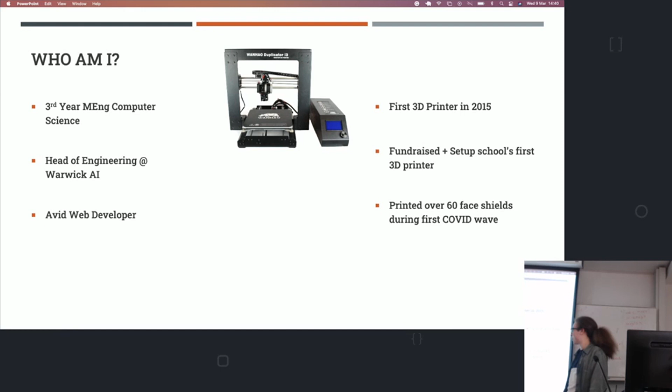I also fundraised and set up our school's first 3D printer. As a small school, it was quite a big thing for our product design department to have our own 3D printer. Also during the first COVID pandemic wave, I worked with a team called 3D Crowd, who gathered thousands of 3D printers around the UK to make face shields. I printed over about 60 of these components for face shields.

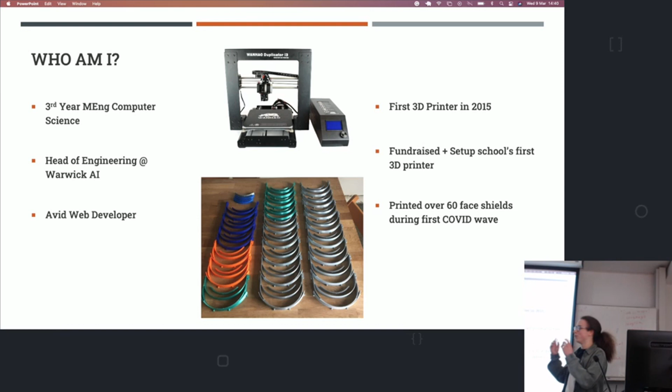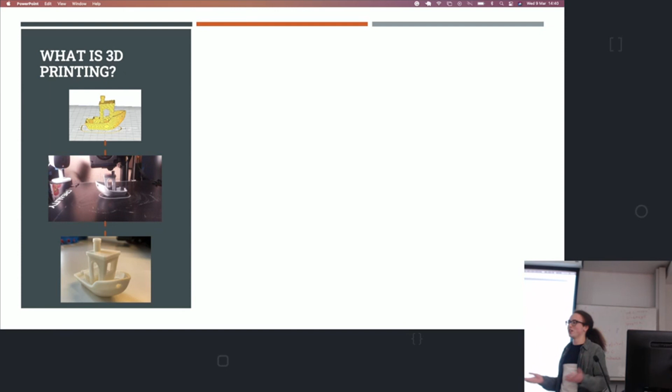So to start off, what is 3D printing? Over recent years, people have associated it with one 3D printer design, but it's a lot more general what 3D printing is. The idea of 3D printing is to create a 3D object via an additive manufacturing process, so not removing material, just adding material, from a digital specification or model, like a CAD file or some machine code instructions. That's typically how it's done.

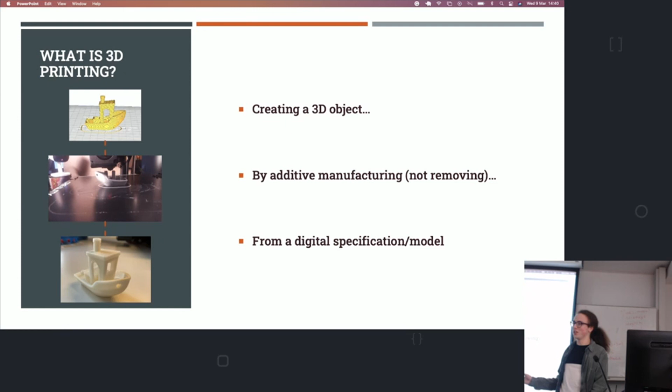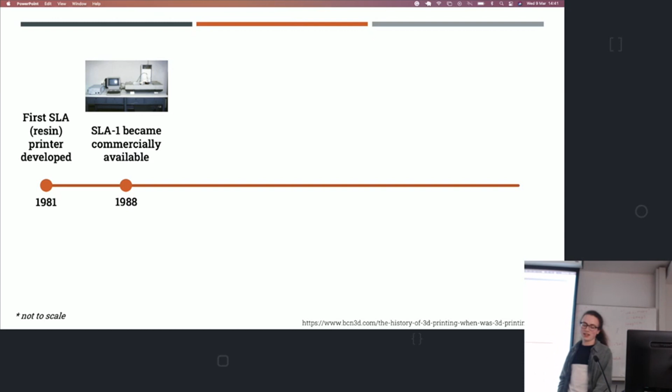Now you know the basic idea of 3D printing. We'll go a bit through the history. The first 3D printer concept was developed in 1981. It was an SLA machine, basically where you've got resin and you cure the resin with a UV light. A company took this idea on and released the first commercially available machine called the SLA1 in 1988. In that same year, a patent was filed for another form of 3D printing called SLS, where you've got powdered metal, and with a laser you do loads of little welds to produce a 3D part, then you layer it up.

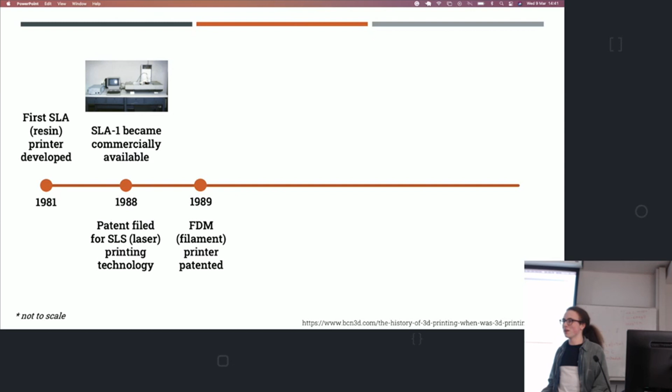Then in 1989, a patent was filed for FDM printing, which is the standard, most well-known 3D printing method that you're probably familiar with. Between 1989 and 2005, 3D printers were mostly used commercially, often as rapid prototyping machines, not really for final parts for anything, more just internally to develop models.

Then in 2005, the RepRap initiative was started, and the whole idea with RepRap was to create a 3D printer that could print another machine, so print parts of another machine or the complete machine, and also print other stuff. That, combined with the patents for FDM expiring in 2009, is how the modern day 3D printing revolution started.

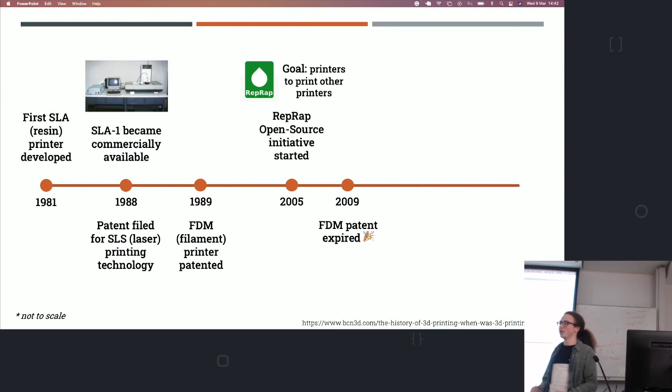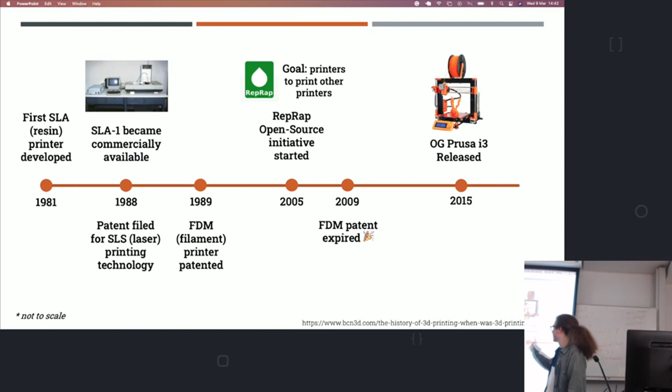Between 2009 and 2015, printers became cheaper, components got cheaper, and standards were starting to be introduced. Then Prusa, probably one of the most well-known 3D printer companies, released in 2015 their standard i3 Prusa design, which is what a lot of 3D printers are based off. The 3D printer I've got at home, you can tell it's this similar box shape, and the design is still used today as the standard.

So I'm going to go quickly through different types of 3D printers. There are 4 types that are seen. The first one is the standard FDM, or fused deposition modeling. The idea of FDM is you've got a reel of filament, and you work from the bottom up, laying down layers of plastic. You build up layers, and you can often see the layers when you do FDM printing, because it squishes the layers on top of each other to build a 3D model.

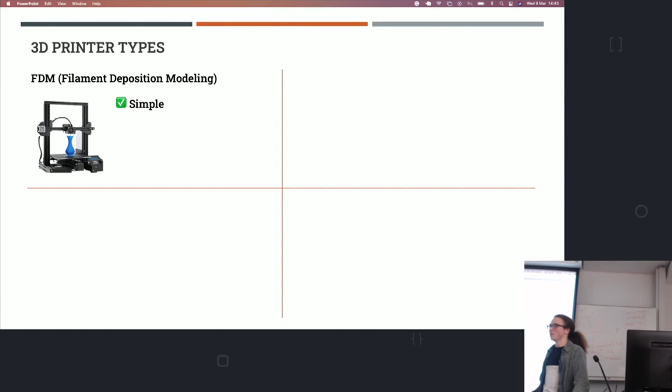The advantages of this is it's very simple in comparison to the other methods, which you'll see in a minute. It's also quite low cost, both initial cost and material cost. And it's very safe to use - the only real dangerous part is the hot end, which is usually over 200 degrees, but as long as you don't touch that, there's not much that can go wrong.

The issue with FDM is because you're printing layers, you've got to physically, manually move a hot end around to lay the material, so it's quite slow. And the speed of your prints scales with the volume.

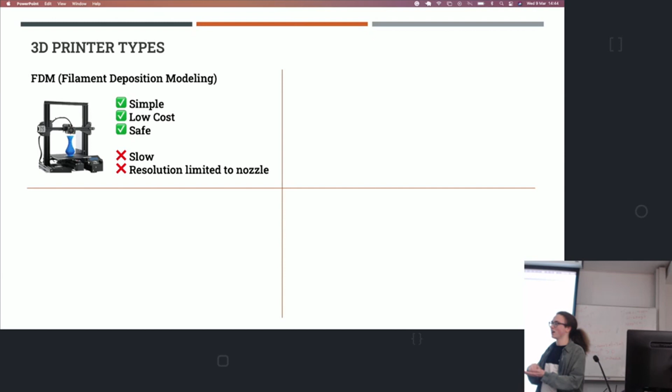So you can imagine if you increase the size of your model by 2 times, your volume increases 8 times, so your 3D printing time takes 8 times longer. Also your resolution, how fine of details you can do, is typically limited to the hole diameter in your nozzle. That's a trade-off: if you make the hole smaller, you have to print slower because you can't push as much filament through, but when it's bigger, you lose the resolution, so your minimal thickness of material you can extrude gets higher. You can't be as finely detailed.

On the other end of the spectrum, there's SLS, selective laser sintering. This involves a fine powder, typically metal, sometimes plastic, spread across a bed. A laser with a mirror will direct around to weld parts of the powder together to form a shape, then it puts another layer of powder and does the same. So again it's this layering up process, but instead of extruding material, it's welding material.

Now you get very good print quality with this because your resolution is no longer determined by the nozzle size, it's more determined by how finely you can move the laser. It produces very strong parts. This is down to being able to produce metal parts, whereas you can't really extrude metal out of a standard 3D printer.

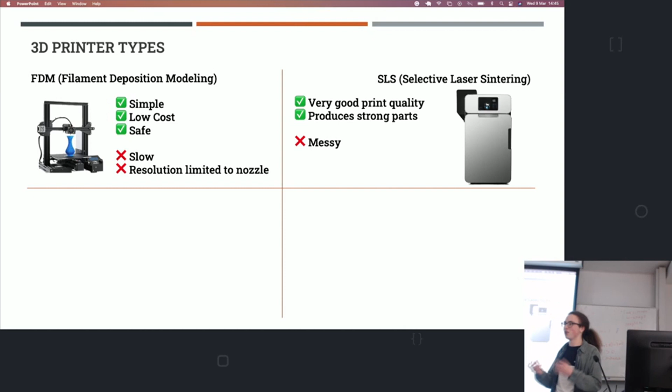But the issue is it's quite messy, so the powder isn't very nice to deal with. It's very fine, almost like dust, and it's not for consumers at all. It's very expensive, these machines can easily cost 100 to 1,000 times more than an FDM. They're typically used in industrial applications, and tend to be used more for final parts in a mechanical assembly, whereas a lot of the time FDM printers are more just used for fun models, where you don't need to depend on the part as much.

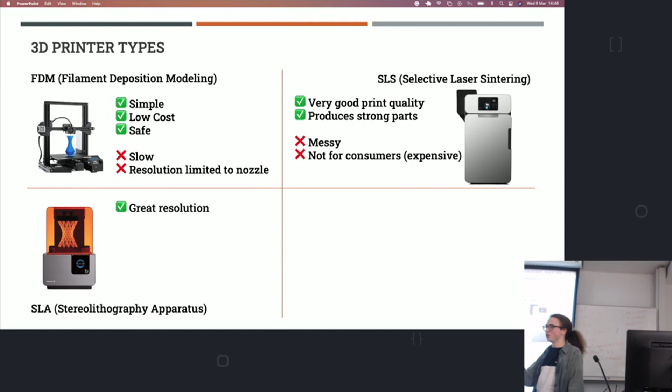Then the third type of 3D printer is SLA, which is curing resin with UV light by moving the UV light with a mirror. Similar to SLS with the mirror, but now it's UV light and you've got resin, a liquid material. Again you're limited in resolution by how finely you can move the UV light, so it's got quite good resolution, and really good print quality too, because of that high resolution.

But the issue is resin, especially uncured, can be very dangerous. It's got fumes, so if you inhale it you can easily get an allergic reaction. You've got to wear gloves when handling it. And when you take prints out of the machine, they're not necessarily fully cured, so there's danger even once the print's finished of being harmed by the material.

They're also slightly more expensive than FDM, though they're coming down in price over recent years. The craze that happened with FDM has happened with SLA too, in that a lot of the companies that made really good FDM printers, like Prusa, have now made SLA printers.

The final printer type is DLP, which is similar to SLA, but instead of moving a UV light around with a mirror, you can think of it as a screen, and the screen flashes light with a trace of where it wants to cure the resin. So if the resin is above the screen, wherever the screen is lit up, it will cure that shape in the resin for that layer, then the layer pulls off and it does it again for the next layer.

So again, it's got the same qualities as SLA, great resolution, amazing print quality, and one more advantage: it's a constant time per layer. No matter how much you want to cure on one layer, it takes the same amount of time between prints, because you're no longer having to move something around. You just flash the light, displaying what you want to cure on the screen, so there's no mechanical moving parts.

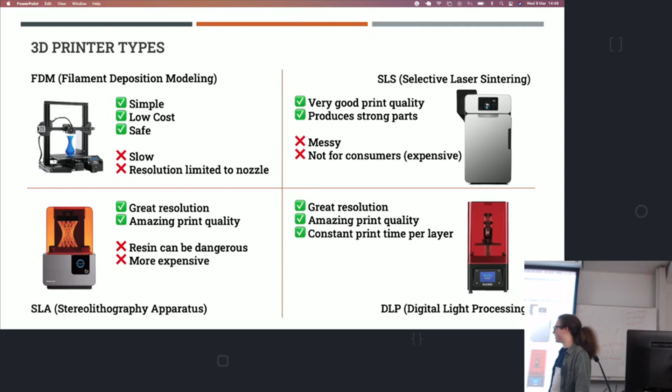The only mechanical part on these is lifting the bed up and down, so there's a lot less to go wrong, and that's kind of the standard. People kind of mix up SLA and DLP. DLP is the cheaper version of SLA a lot of the time, just because it's easier to make and maintain. But again, resin can be dangerous, and it's slightly more expensive than FDM.

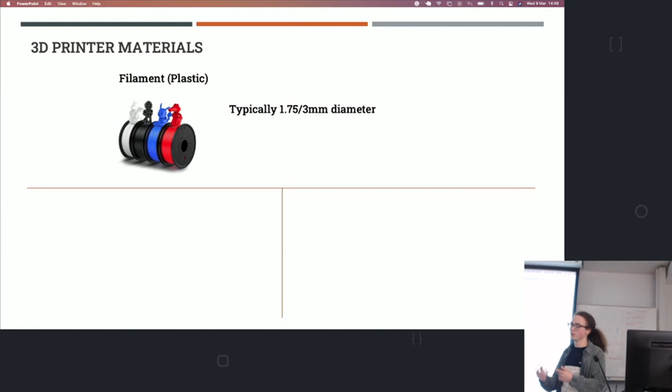Moving on to the different types of materials you can print with. As mentioned earlier, FDM uses plastic filament, typically 1.75 to 3 millimeters in diameter depending on the printer. Most printers you buy use 1.75mm. They get pellets of plastic and extrude it into a long filament spool, typically coming in 1 kilo spools.

Because of the requirements of 3D printing with filament, all it needs is to maintain its integrity in storage, and as long as it can be melted at a reasonable temperature, you can basically use whatever material you want. The most popular one is PLA, polylactic acid, which is based off a naturally occurring material. Then there's ABS, which is a bit stronger, and PETG, which is even stronger.

You can also print with stuff like chocolate. They've made chocolate-infused plastic to give it the scent of chocolate, but people have modded their machines to actually print with chocolate filament. Typically it's not done via filament then, it's more like a hopper design with the chocolate melting and running through.

With FDM printers there are so many different materials out there: recycled materials, metal-infused materials to make it stronger, wood-chip infused materials to make it look like wood. There are so many. As mentioned, PLA is natural, so you can actually get food-safe prints out of an FDM printer. It's also the cheapest option, at roughly £25 for a good roll of FDM filament.

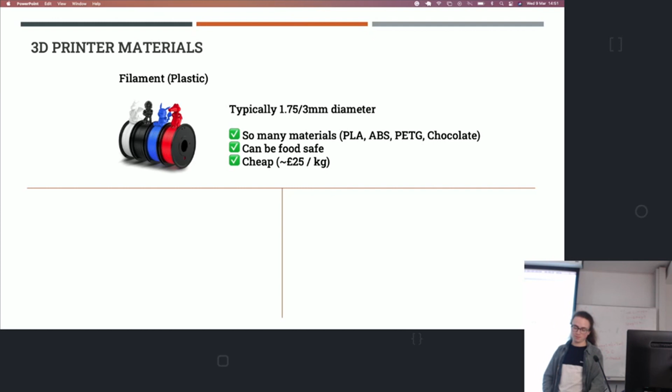The other material is resin, which is used in SLA and DLP, and it's a liquid form material. The issue with resin, as I said earlier, is that it's harmful until cured, and it has fumes associated with it. It's also more expensive, at about £100 per litre.

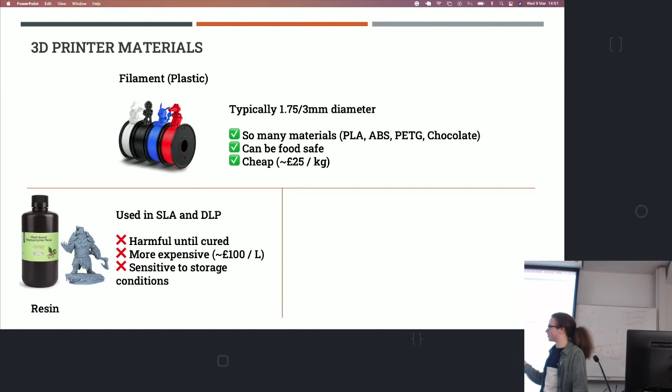Roughly a litre of resin will print about the same amount of stuff as a kilo of filament. You can't make a true one-to-one comparison because you're typically printing in different ways, but it's a similar price for the amount you use. Resin is also sensitive to storage conditions because it's cured with UV light. If you put it in a translucent container it would cure over time and turn into a solid plastic bottle, so you have to store it in opaque bottles.

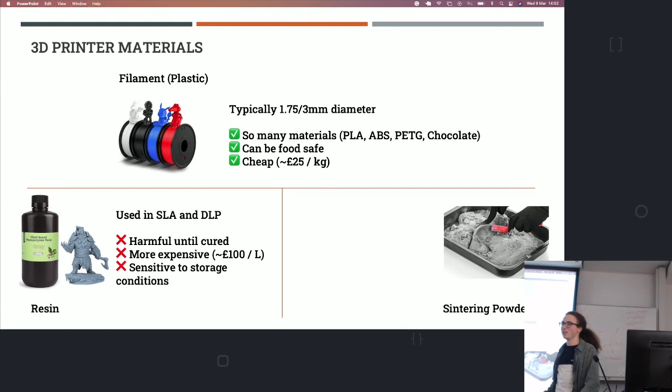The third material, which isn't really available to consumers because it's used more in industry, is sintering powder, used for SLS machines. It's a fine material and safer to handle than resin, though it's still very fine, so you don't want to inhale it or touch it with bare hands. It's even more expensive than resin because it's not just plain material — it has other stuff in it to improve the sintering process, and it's metal, which is going to be more expensive than plastic.

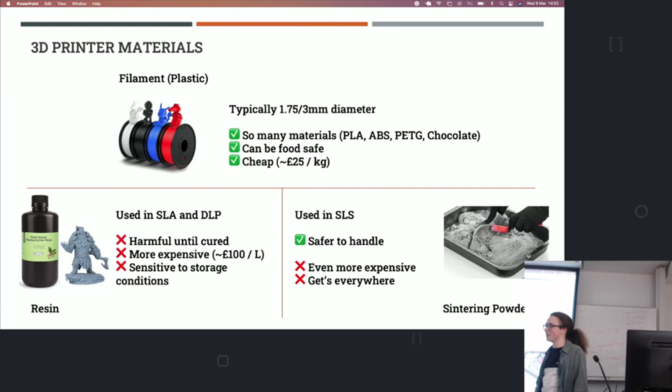It also gets everywhere, so it's not very practical to use. That's another reason you don't really see it in home workshops. It's more used by big companies to make actual parts for products — Formula One, for example, uses SLS to print parts for their cars, and aerospace engineering also uses SLS.

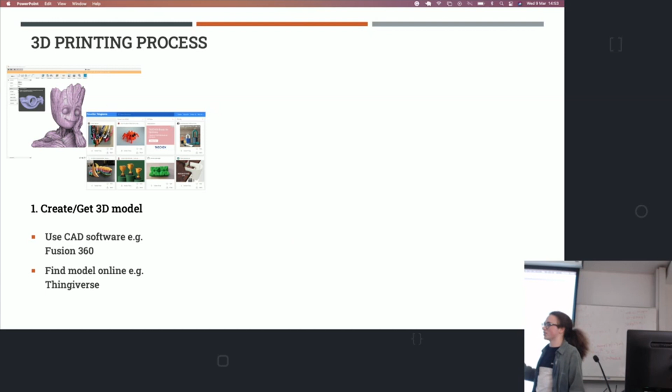So I'm going to talk a bit about the 3D printing process. You start off with a model. This can either be a model that's already been made from Thingiverse, which is a massive repository of 3D models with basically everything on there, or you can make your own in CAD software like Fusion 360.

You want to export that model format into a format called STL, which is a triangular mesh that's the standard within industry. So you're converting your geometric representation of your model into a triangular mesh.

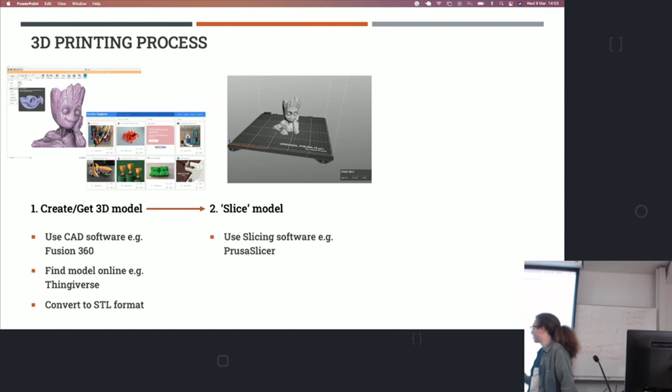Then you send this model over to a slicer. An example is PrusaSlicer. What this software does is convert your mesh into G-code. G-code is a machine instruction code that you run not just on 3D printers, but on CNC machines and laser cutters as well. So G-code is just instructions to send to the printer.

It's called a slicer because it splits your model into slices or layers. You specify how big you want each layer to be, and then it says for this layer, draw this path, for the next layer, draw this path, plus other instructions like heating up the filament, turning the fans on, and finishing the print.

When you slice, you'll also be told things like the print time and how much filament it approximates you'll use, which is quite useful to know if you've got enough left on your roll to finish the print. In the slicer you can also specify if you want to print multiple materials.

You can say this area or this part wants to be a different color. So if you've got a printer that can print in multiple materials or multiple colors, you'd specify that in your slicer.

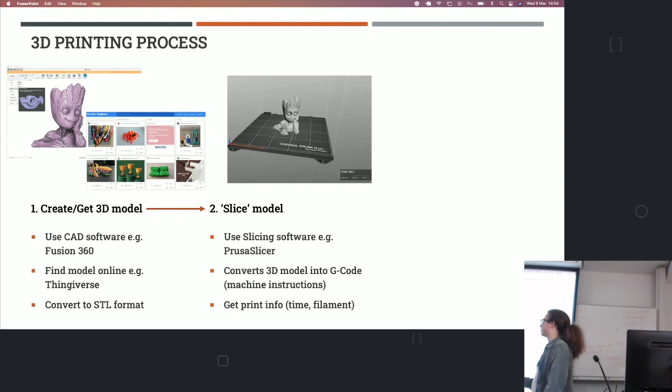Then the final step is to print. Obviously you need to load your file into the printer and you print the model.

Some printers require extra steps after finishing the print. With SLA, because it's resin, the prints aren't fully cured after they come out. They're structurally stable, but you want to cure them fully. Typically you either put it out in the sun, or use products like UV light boxes that spin the part and make sure it's all cured properly.

That's kind of why FDM is still the most popular, because you print it and as soon as it's done, it's basically ready to go. You don't need to do much afterwards. You can sand away the layers or use acetone to melt the layers so you can't see each individual layer, but I never have. Usually the print's good enough quality straight off printing.

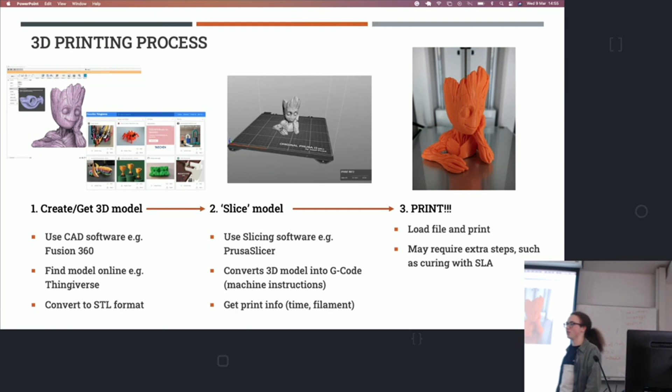So how can UWCS help you with 3D printing? They have this machine here, which is a Prusa i3 Mark IIs, an upgraded version of the original Prusa I showed you earlier. They've also upgraded it themselves with multi-material support, which allows you to have multiple filaments used in the same print. I think it's 5 - you can print up to 5 different materials in the same print.

So you can actually print with different materials. If you've got support material to support an overhang, you can print that in PVA filament, which means it can dissolve in water. There's cool tricks you can do like that. A lot of the time people just use it to print with different colors.